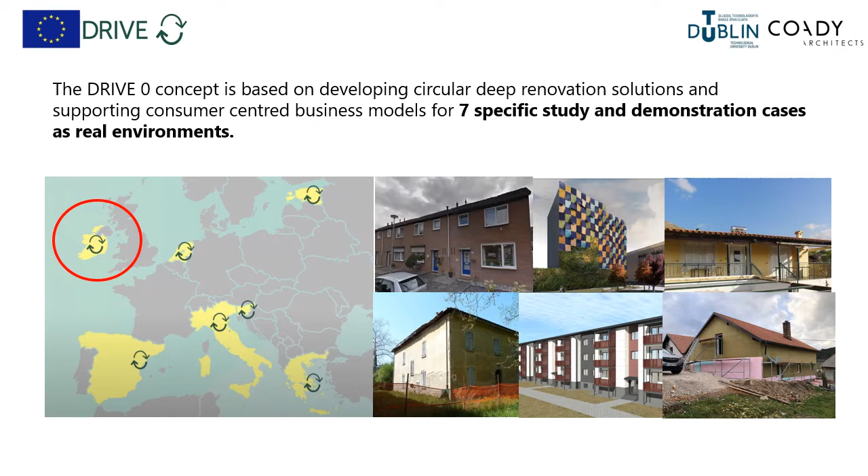The project is demonstrating these concepts and solutions in 7 demonstration cases across Europe, representing quite a diverse range of housing typologies and stock. The transition from a linear economy to a circular economy is a key aspect of the Drive Zero project.

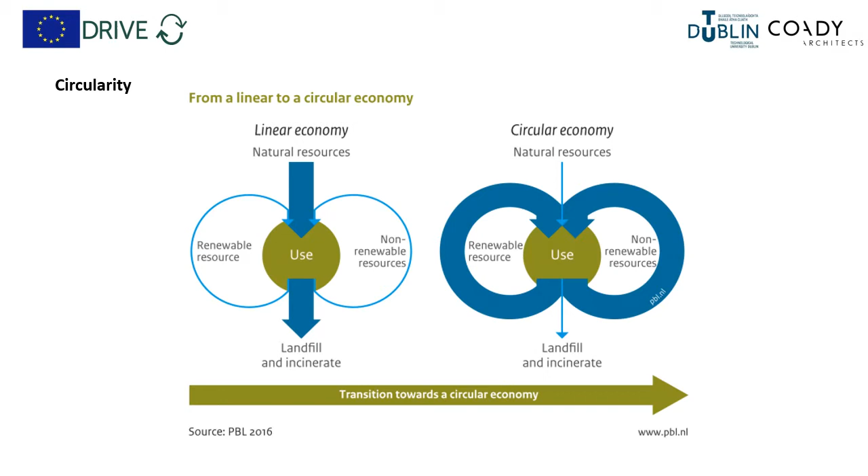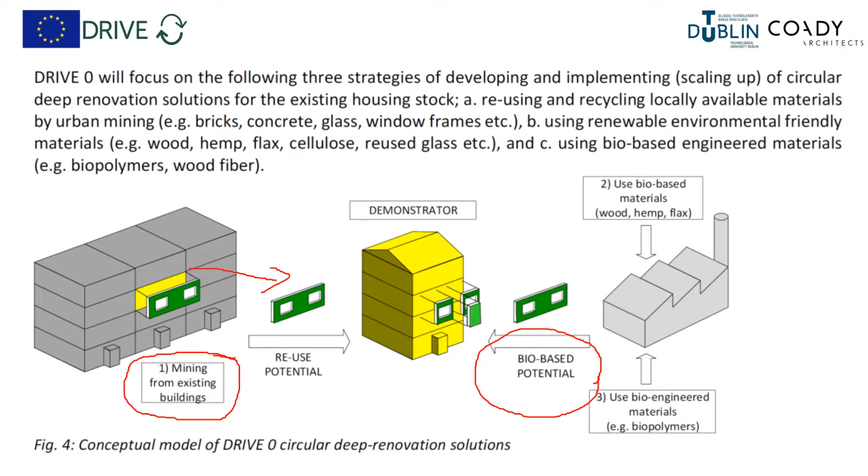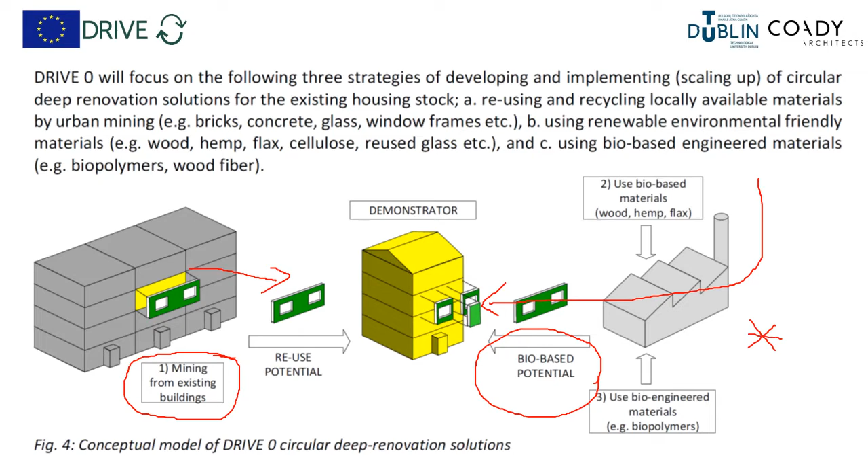The two main broad strategies that are being used within Drive Zero to promote circularization are firstly urban mining, whereby materials, resources and elements from the existing construction sector are being utilized and applied in demonstration cases. And secondly, biobased material application, whereby biomaterials or bioengineered materials are being taken from the biocycle and being utilized in the demonstration case. This second aspect is the core focus of the Irish demonstration case.

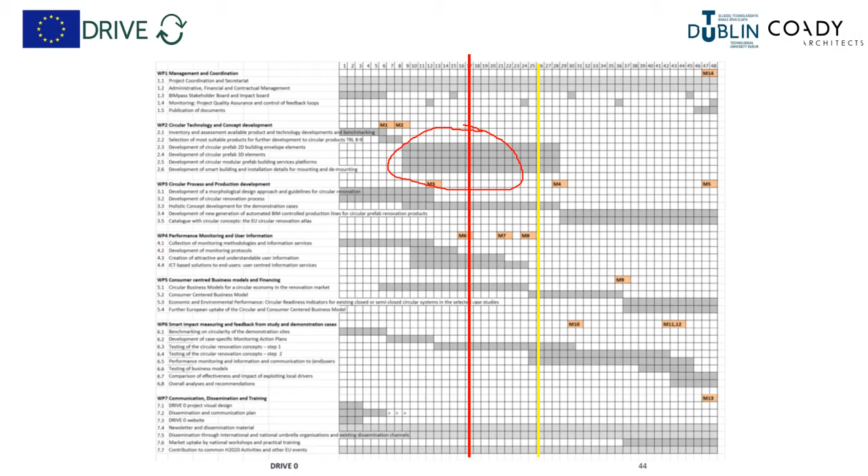The project has a number of work packages and stages, and we're currently 1 year into the project with a focus on development of circular solutions for 2-dimensional facade upgrades and 3-dimensional pod extensions.

So the team involved in the Irish demonstration case includes Technical University of Dublin, Dublin School of Architecture, who are the academic research partner and principal investigator. Coady Architects are the industry partner and architectural design partners. VisionBuilt are the modularised manufacturing partner, supplying the circularised 2D facade upgrade and 3D extension components. And Westmeath County Council are the building owner, supplying the demonstration cases. And we are being given support and direction from a national advisory board.

The Irish demonstration case is located in County Westmeath on the outskirts of Athlone and is part of a small cluster of houses, 3-bed semi-detached houses that were built in the mid-1970s. The Irish demonstrator case represents a very typical Irish house typology, the 3-bed semi-detached house. They were built in 1975 of masonry cavity wall construction with cut roof and vented attic.

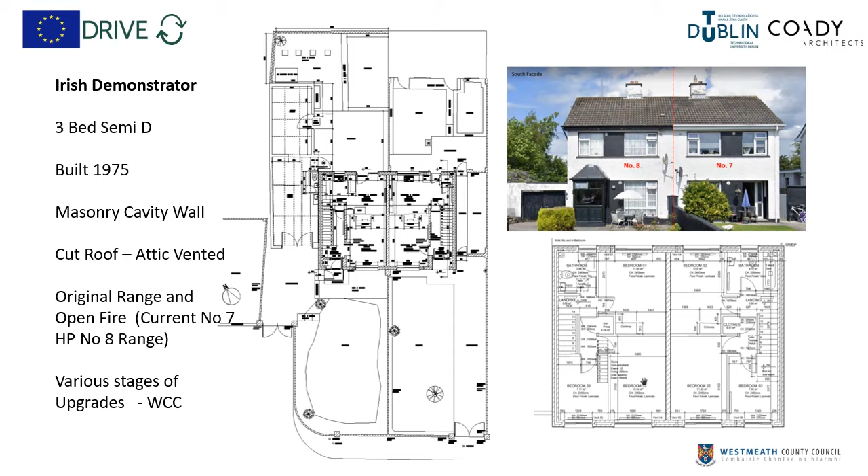The original heating system was range with open fire, and number 7 now has a heat pump installed as its space and hot water system, and number 8 is still operating on the original range. The houses have had various upgrades undertaken by the building owner, Westmeath County Council.

The two case dwellings have significant differences in their energy characteristics and energy performance. Number 7, which has the heat pump installed, is a C1, and number 8, which is still based on the original range and also has an attic extension, is rating at E1. Both properties have had the cavity wall pumped. Both properties have had insulation applied in the attic on the plane of the ceiling.

They're both uninsulated floors. They both have double glazed air-filled windows, but number 8 are of a lower and poorer thermal performance given their older age. The significant difference in the two properties is in the space heating and domestic hot water, with number 7 being based on heat pump and number 8 being on a low efficiency solid fuel range. Both houses are ventilated by passive means and both have standard lighting.

An average rating of the two dwellings is coming in at D1, and based on that, the Drive Zero project is aiming to get a 70% uplift improvement, taking both properties or the average of both properties to A3.

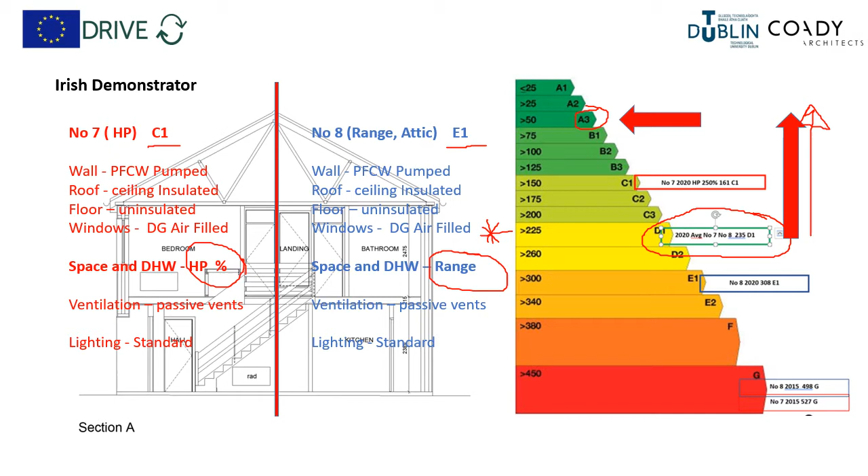The application of modularised solutions will focus on the application of a 2D facade upgrade and a 3-dimensional extension pod, all of which will be pre-manufactured using modularised construction, but adapted to facilitate design for disassembly and biobased specification.

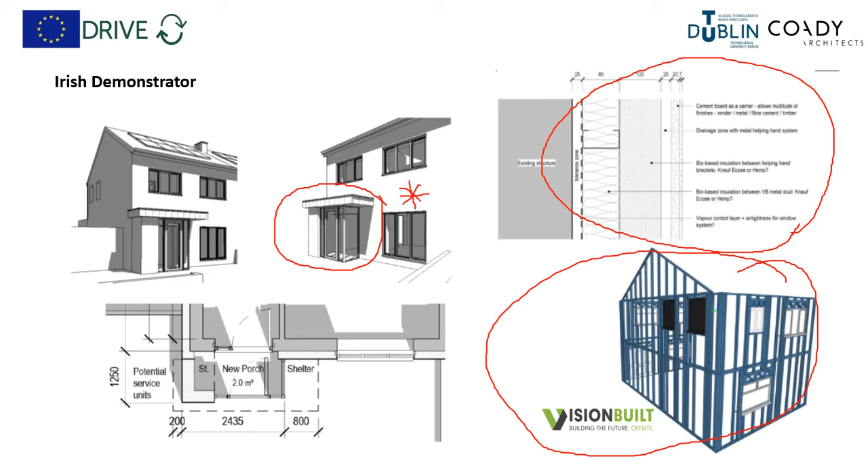This schematic presents an overview of the proposed scope of works for the demonstration project. Firstly, a 2-dimensional modularised circular facade upgrade, including windows and doors, a 3D modularised circular extension, heating systems and water system upgrade for property number 8, renewable energies for both properties, and new ventilation system to both properties with ancillary upgrades and lighting upgrades.

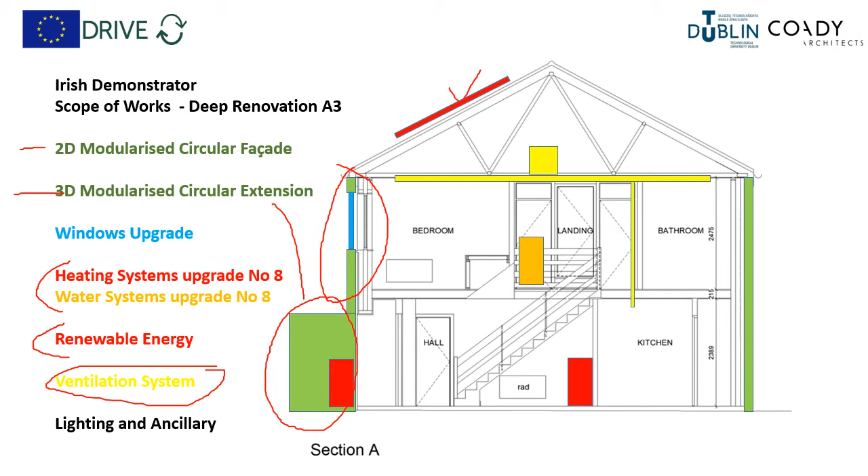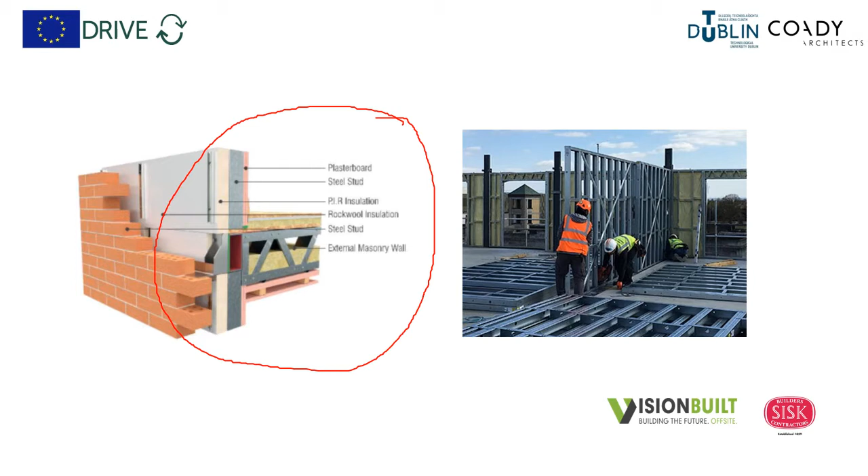So the current focus of the project is working with our partners VisionBuilt to modify and adapt their conventional construction approach to facade cladding retrofit and also circularized specification. So here we see preliminary technical drawings of the 2D facade panel. We have the higher level facade and the ground floor facade panel here.

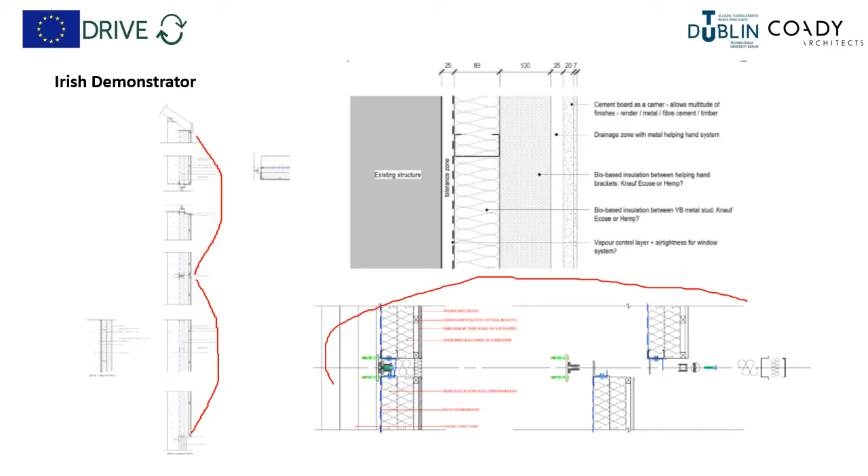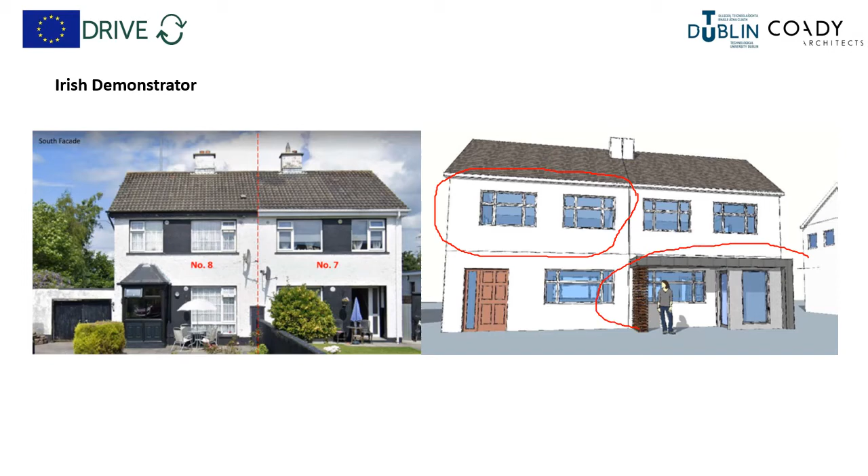Schematics showing assembly, disassembly sequences and proposals for enhanced specification for bio-based materials. So the overall concept of the modularized facade upgrade is the supply and install of pre-manufactured, complete and finished facade upgrade panels and pre-manufactured 3-dimensional pod extensions.

The concept of circularity is central to the Drive Zero project, and here we see the butterfly diagram from the Ellen MacArthur Foundation explaining the concept of circular economy. So here we have resources, and we have the stages of manufacture, supply, use, and then end of life to waste.

And in the conventional system, we have high material use and high wastage, but the circularization process is seeking to take materials, components, parts, and elements and reintroduce them as close as possible to the higher parts of the supply chain in order to reduce environmental impact and wastage. And it's clearly demonstrating two key cycles: the technical cycle and the biocycle.

So within the technical cycle, the greater measures are to share and reuse compared to recycling, where there will be material loss and degradation and additional material and energy inputs. On the biocycle side, there are a number of cycle options.

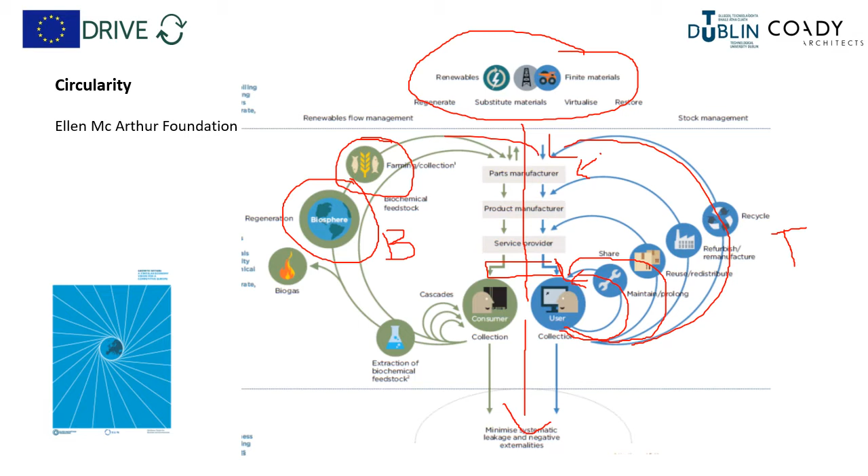One is an equivalent to the technical cycle where materials and elements re-enter the supply chain, but also there's the possibility for extraction of resources and energy, and that materials that are biological can re-enter normal breakdown within the biosphere and re-emerge as other materials within the cycle and thus re-enter the system.

So Drive Zero is examining the application of those concepts specifically within the construction sector. So here we see a linear and circularization flow path more specific to construction. So we have extraction of natural resources being processed into materials, materials being formed into components and parts, and then assembled into elements and buildings. And then we have a building use phase and a decommissioning or disassembly rather than a demolition phase, and waste.

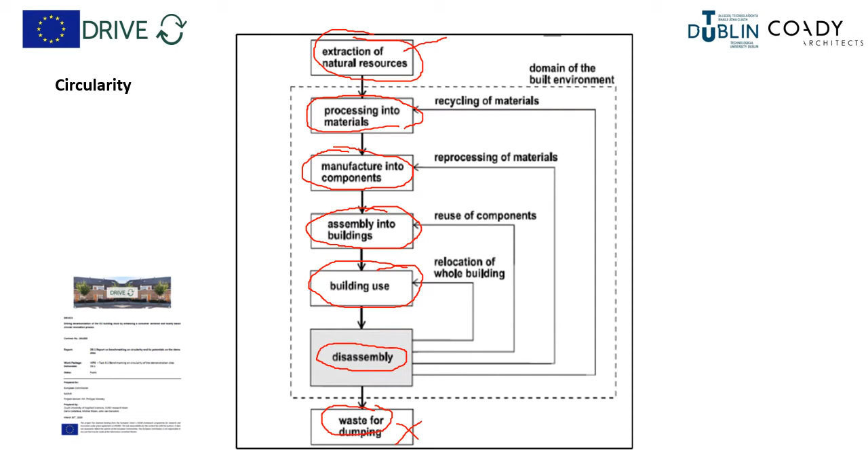So the concept of circularity is to reduce dependency on these and to reduce these outputs by facilitating this circular process whereby materials, elements, components and parts re-enter the system at the lowest level of loss, so as close as possible to building use and function. So actually in this scenario, recycling is the lowest level of circularity, the least advanced.

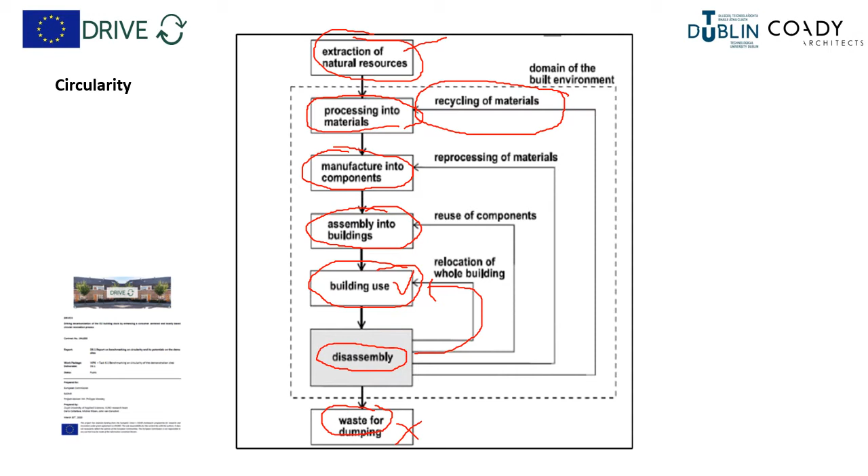Circularity in construction is an emerging field with growing research, and the application and assessment of circularity in particular is complex. There are a diverse range of circularity definitions and diverse indicators being discussed and proposed. An example is Saidani, who has classified over 55 circularity indicators based on 10 criteria.

We're also seeing the emergence of a diverse range of methods and tools, from very high-level tools such as the material circularity indicator developed by the Ellen MacArthur Foundation to more specific building circularity indicator tools such as developed by Alba Concepts.

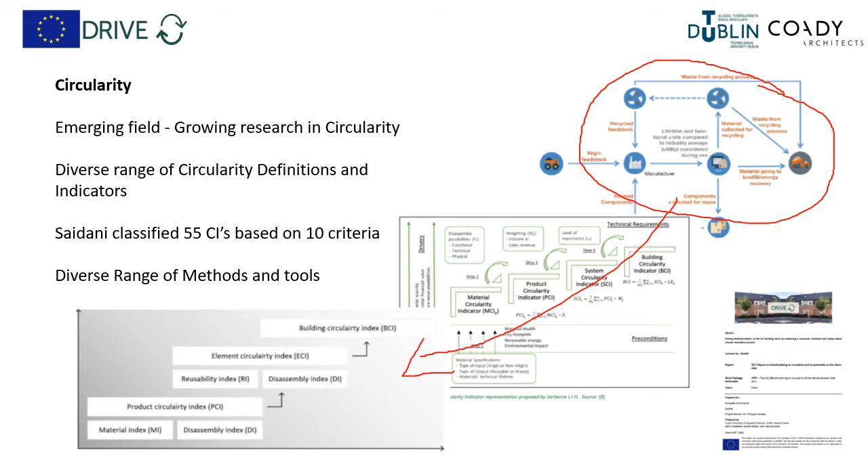One key and core indicator that's very much at the heart of circularity in construction is the aspect of design for disassembly and associated design for adaptation and design for flexibility. The ability to disassemble and adapt is critical to facilitate the recircularization of buildings or their elements, components, parts and materials. So this aspect is fundamental and at the core of circularity.

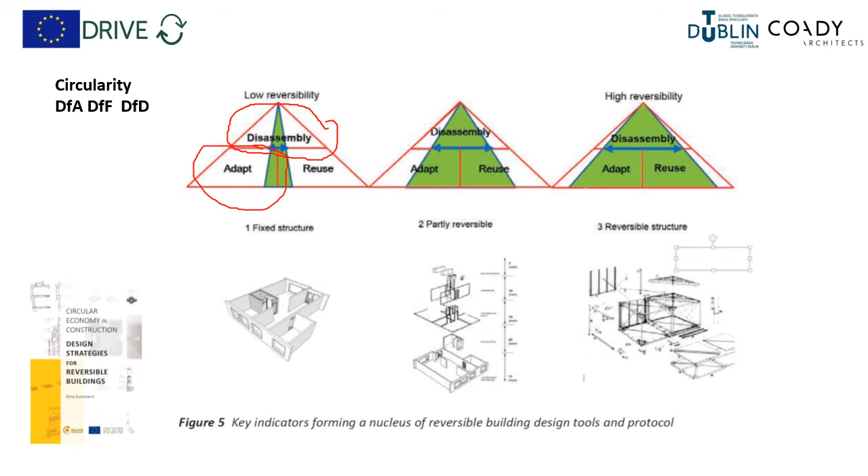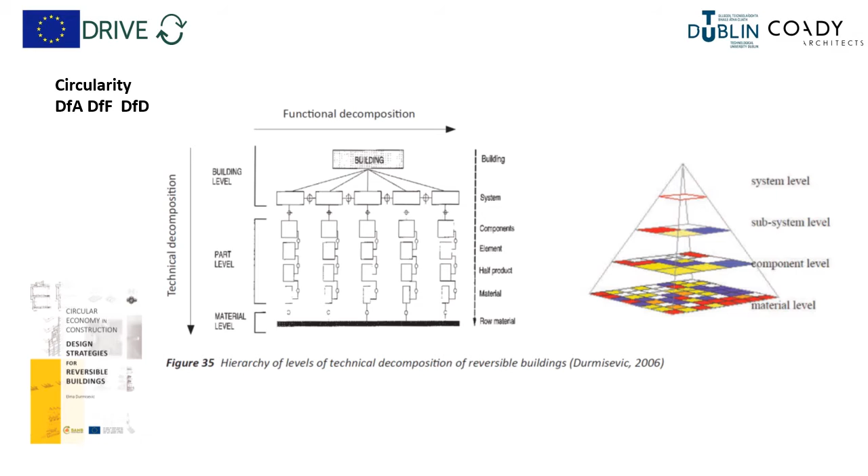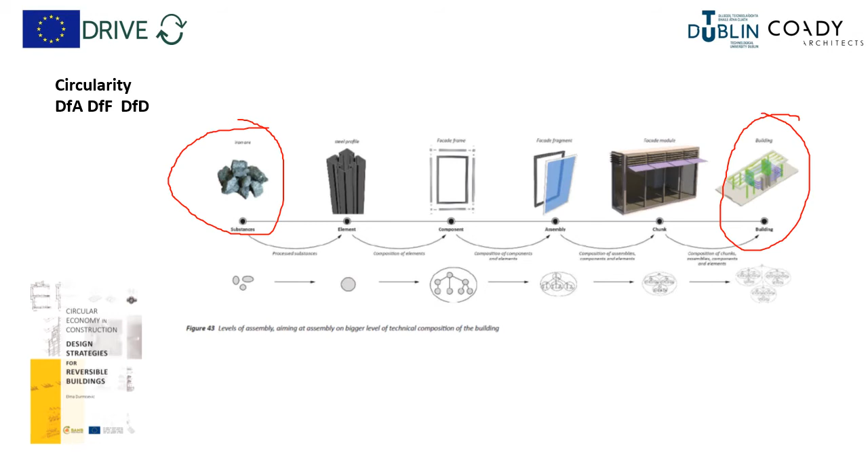We can begin to consider the challenge and complexity of assessing design for disassembly and measuring it as we start to consider buildings in terms of their hierarchical structure and the difference between technical and functional decomposition. And when we consider the level of definition that one needs to go to from building to element to component to material level, we can see the level of complexity and disaggregation and the data sources that are needed to truly undertake in-depth design for disassembly and also circularity assessments in buildings.

The Drive Zero project is based on its own particular definition of an optimal circularity focused on both energy and materials. A circular deep renovation which contributes to a circular built environment based on 100% life cycle renewable energy, with all materials used within the system boundaries part of an infinite technical or biological cycle with lowest quality loss as possible.

So circular is much more than just reuse or recycling. It's also trying to reduce the amount of initial and recurring and additional process energy by the circularization itself, and therefore has an emphasis on 100% renewable energy contribution as an optimal circular target with infinite material life cycle and lowest quality loss possible.

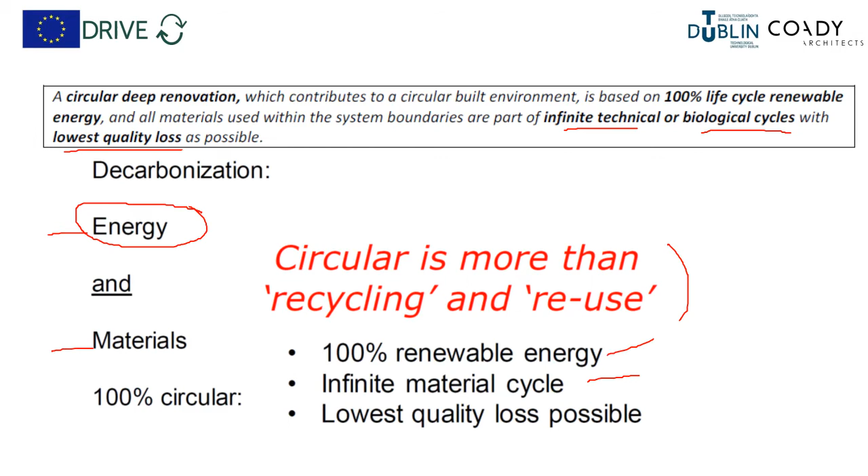The Irish demonstration project has focused its circularity emphasis on bio-based materials and the biological cycle. A comprehensive inventory was undertaken of available bio-based materials within Ireland. And from that, a range of proposed alternative bio-based materials have been made for consideration within the 2D facade panel. Importantly, this study highlighted the import dependency for bio-based materials within the Irish construction sector.

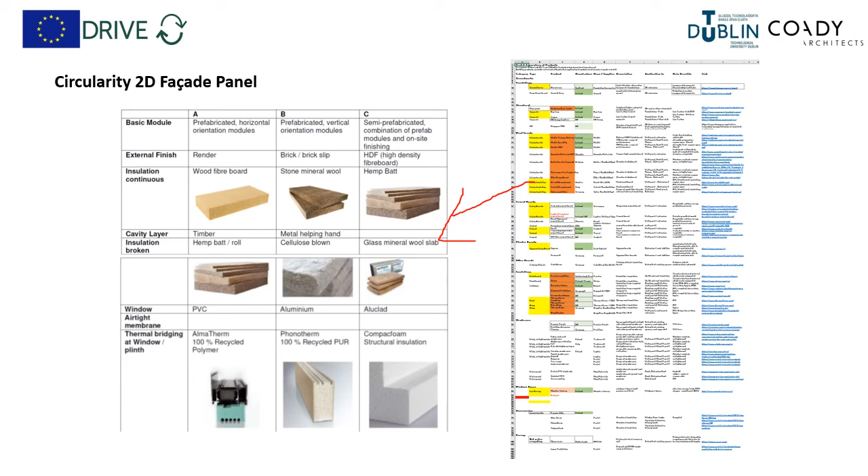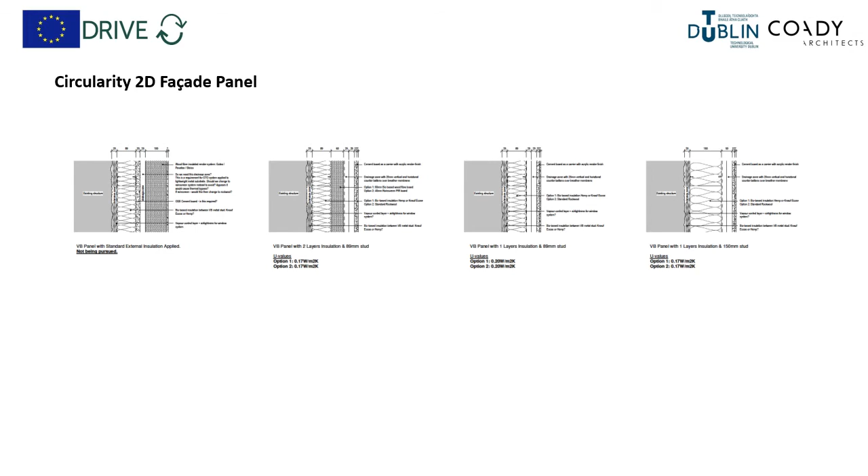A range of constructions and material specifications have been proposed, including conventional insulations and bio-based insulations, for assessment within the Drive Zero circularity approach. The circularity assessments for construction undertaken within Drive Zero have focused on two key aspects: design for disassembly and embodied energy, embodied carbon of materials. These have been applied for the 2D wall facade upgrade.

In the Irish case, a design for disassembly assessment using that approach was undertaken for a comparative assessment of the two-dimensional modularised wall panel based on conventional insulation materials, both quilt and plastics, and the 2D wall panel based on bio-based alternatives, both of these being compared with a conventional EWI system alternative.

The results of that assessment gave overall indicators as follows. The 2D modularised solutions were scoring at medium circularity, 0.72 for the conventional and 0.75 for the bio-based, and the significantly lower score attributed to the EWI system, in part due to the material specification, but predominantly due to the chemical bonding and inability to disassemble without damage to materials within that system.

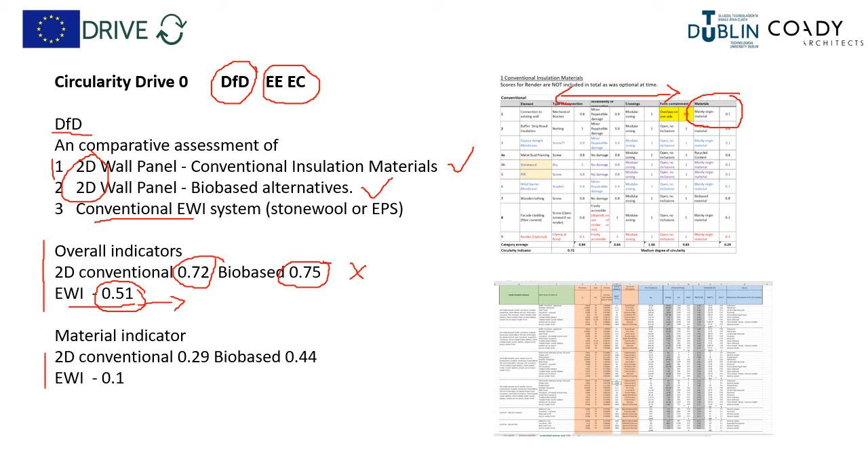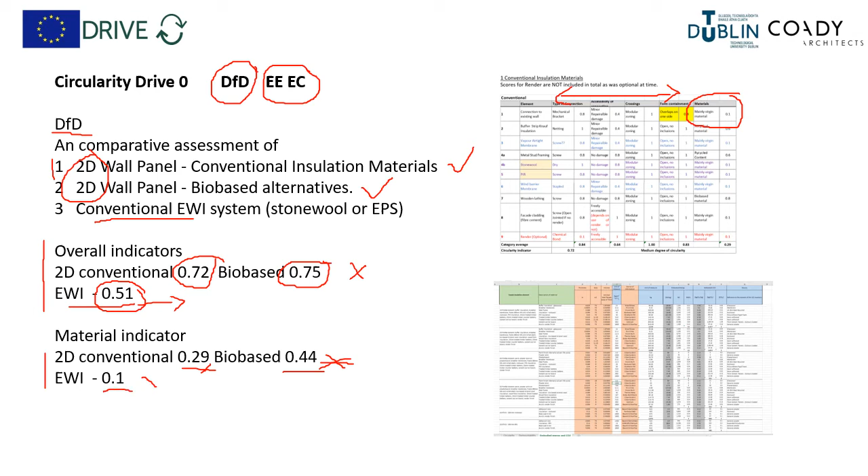However, looking at the material indicator, which was a small subcomponent of the design for disassembly indicators, of which there were four: connections, accessibility, zoning, and perimeter framing, it indicates that the bio-based is scoring better in terms of material specification, with the conventional system second and the EWI system scoring the poorest.

The circularity assessment for construction undertaken within Drive Zero, which focused on DFD and embodied energy carbon, has led to some learnings and critical observations and comments. Firstly, in relation to the scope of indicators used, we see that only two core indicators were used for the circularity assessment, which is significantly limited in comparison to other methods. The DFD assessment only used 4 DFD criteria, whereas other methods apply a more sophisticated range of DFD criteria.

Importantly, the indicators scoring were not weighted or adjusted by proportion of material. So elements that may have been low mass and of lower significance within the construction compared to elements of a higher volume or significance scored, their weighting was similar and their impact in the overall scoring was not adjusted by proportion to weighting, which may have a significant impact on scoring and comparisons. Thirdly, the method was assessed on the construction as a whole and not taking building hierarchy into account.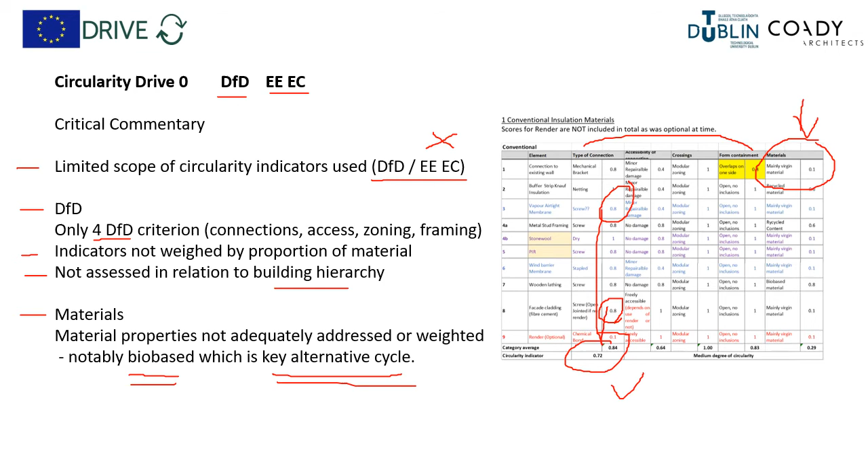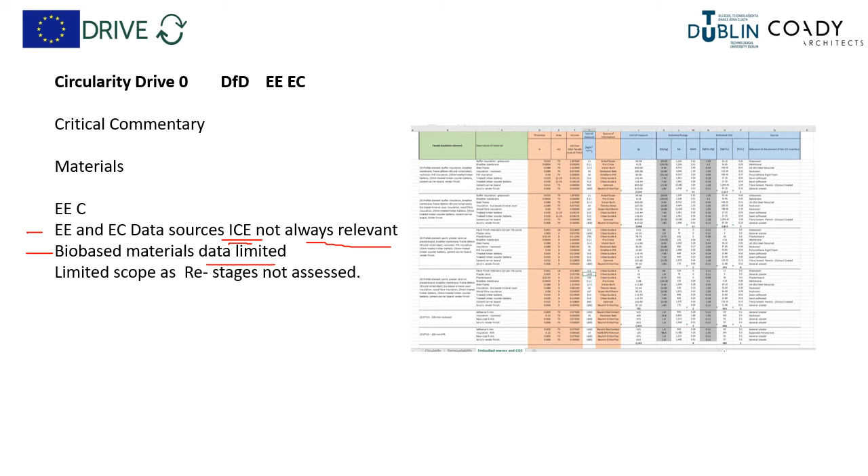There were also important observations and comments arising from the material aspect of the embodied energy, embodied carbon assessment and cross comparison of constructions. Importantly, embodied energy and embodied carbon data sources being utilised from the UK ICE database were not always relevant or applicable to the constructions or the geographic context. Importantly, the bio-based material data within the ICE database was significantly limited, and in cases there was no data for equivalent materials, and therefore dependency on the ICE database would distort results.

Lastly, the material assessment was based on the initial embodied energy, embodied carbon of the materials, and the circularity, reuse, remanufacture, reprocess energy assessments were excluded. So in that sense, the assessment was non-holistic.

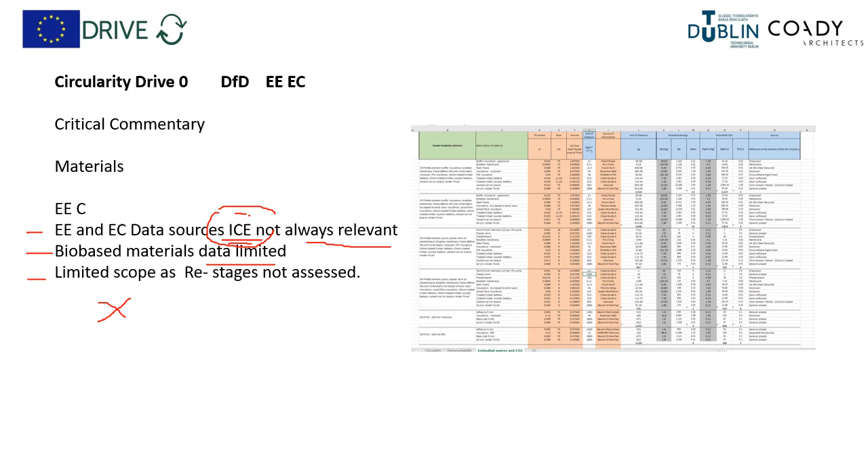Finally, I'd like to take time to make some commentary and discussion on the issue of circularity in buildings and construction arising out of the Drive Zero project. Firstly is to acknowledge and identify that the issue of circularity in construction and buildings is an emerging field with a significant amount of current research being undertaken, and the thinking, methods and approaches are all in development.

Secondly is to acknowledge that there are a diversity of interpretations and definitions of what circularity is. In many cases, the definitions are overlapping with other indicators, particularly environmental indicators. I would argue for a more purist perspective on what circularity is, in that it should be considered circularization of the linear supply chain, and its assessment should focus on what facilitates the circularization process, and that social impacts and environmental impacts or benefits are a result of the circular process and not the object of assessment of circularity.

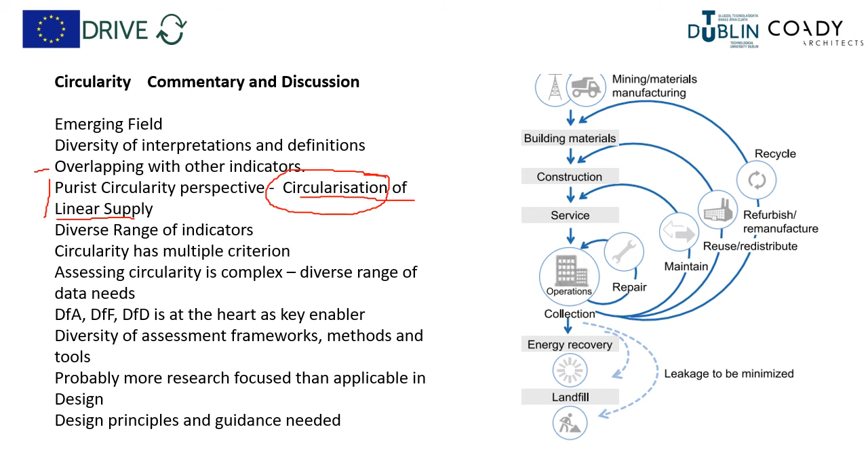It's important to realize that circularity is not one thing, but has a diverse range of indicators. Therefore, a multi-criterion approach needs to be made in relation to assessing circularity, and that criterion will be based on the extent of the circularity definition. However, taking what I'm proposing as a purist circularity perspective, let's discuss some key indicators to give an indication of the range of criterion that would need to be assessed and considered in a holistic circularity assessment of building or construction.

So let's start with a discussion about the raw materials and resources. So we're talking about both energy and physical materials. A key indicator is the amount of those materials being used, or mass, into the supply chain. Another indicator is whether they're from virgin or renewable resources, and particularly if they are from resources of depletion or toxicity, especially toxicity, because any toxic materials that go through this system or are introduced during it will have significant impacts on impeding this recircularization stages, and also have impacts on the type of waste output. So we can see even on a material level, there are a range of key sub-indicators.

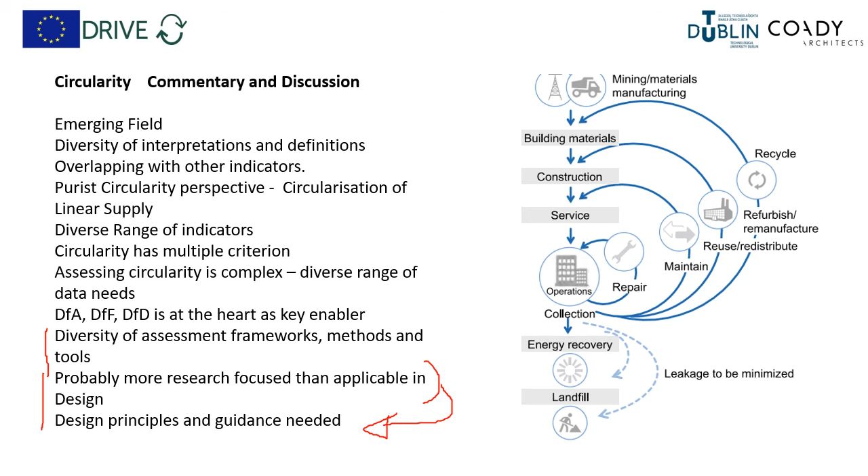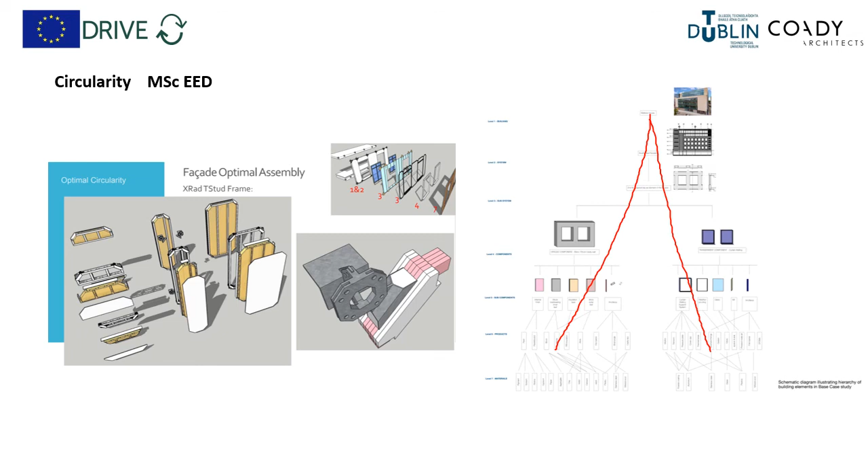And to highlight that, arising out of our Drive Zero research, we are introducing circularity as a component within our MSc in energy efficiency design, both within modules and within studio projects. This is an example of student work looking at circularity assessments, and here we see a student undertaking a hierarchical breakdown of components and elements right down to their base materials. And here we see another student proposing an assembly sequence and designing a modularized facade.

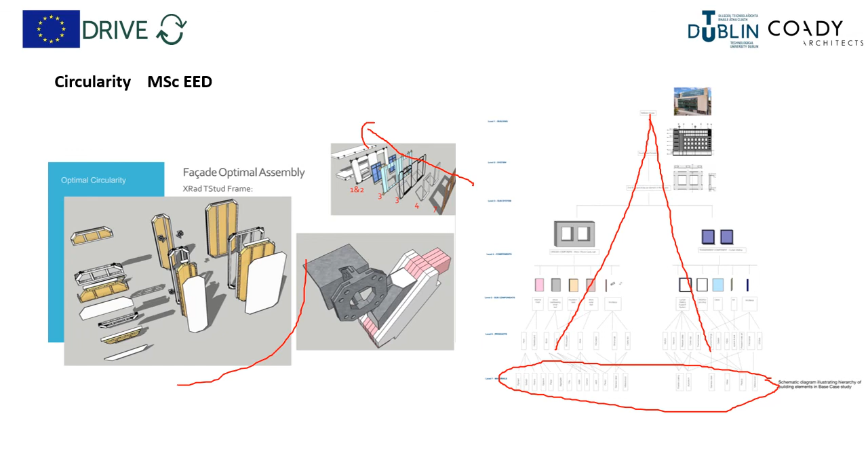So in summary and in conclusion, I'd like to make some comments about the learnings we're deriving from Drive Zero. While we're undertaking a deep retrofit, the main learnings are in terms of modularization and circularity. And while it's clear there are circularity benefits to modularized solutions, they do need to be enhanced. The issue of increased cost compared with increased speed and also the additional utility that a modularized solution may be able to provide beyond just upgrading the thermal envelope is an important aspect, and it's a key focus of our study.

In relation to circularity, we're seeing that it's an emerging field. There is complexity, there's significant diversity, including in terms of assessments. But the key design principles are emerging, and that is the centrality of design for disassembly, adaptation and flexibility, and also that material specification is really important. And it's become quite clear from this work and the work we're doing in the university that we are currently not designing or building circular. So we have quite a challenge ahead of us.